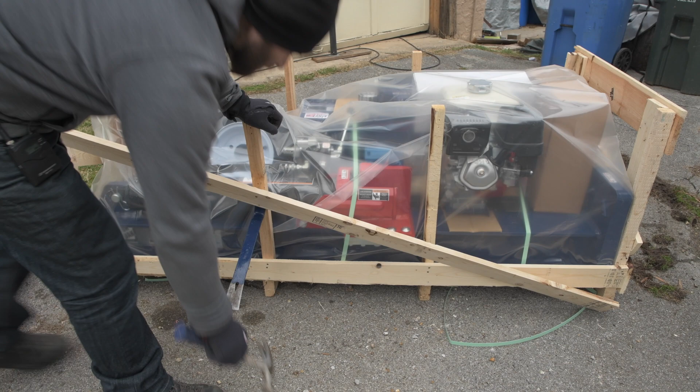Looks like the plastic's stapled down. Comes right off.

Got a couple of boxes here. We'll bring the camera around.

These appear to be wheel covers, fenders.

Let's see what this guy is. Razor blade's dull.

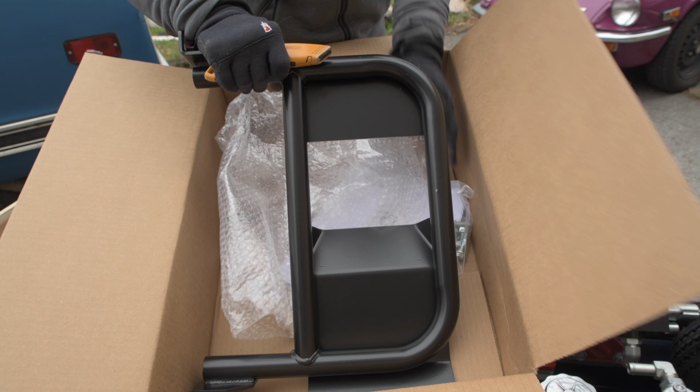That is some sort of big, huge metal guard thing. And this is what I was looking for - these appear to be the instructions. That's what I need. 24, it says. There's another owner's manual.

All right, good stuff.

Hydraulic hose or hydraulic hose armor. And some more metal guards - I'm sure they go somewhere.

We interrupt this unboxing to bring you the most handsome white cat in the world on top of a purple 1972 - I don't remember the year - 1972 Triumph Spitfire. Doesn't he look gorgeous? Are you camera shy? You don't like looking at the camera, do you? What's up with that, man?

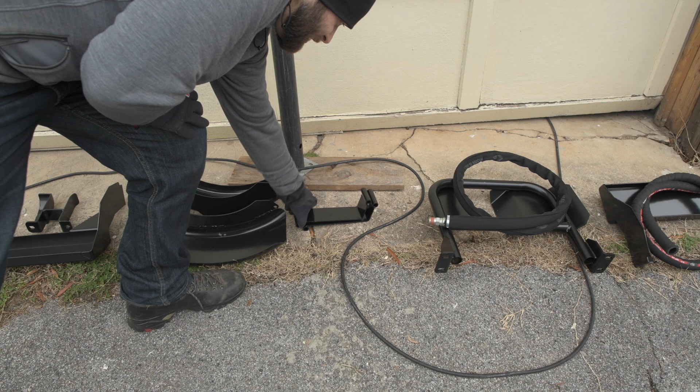All right, here I have laid out on the ground all of the parts I got out of the boxes. Some sort of a tray thing, some sort of a brackety thing, looks like wheel covers, more brackety things, some sort of a guard, hydraulic hose armor or soft hose or something - I'm not sure what that is.

And another tray, that looks like an identical copy of the first one at first glance. So all of those were in boxes. And this is what we have left on the crate: an instruction manual for an engine guard, kind of weird that you'd need a manual for that, but it seems to be the thing. And then the actual owner's manual, which is fairly thick. I'm going to read into that in a minute.

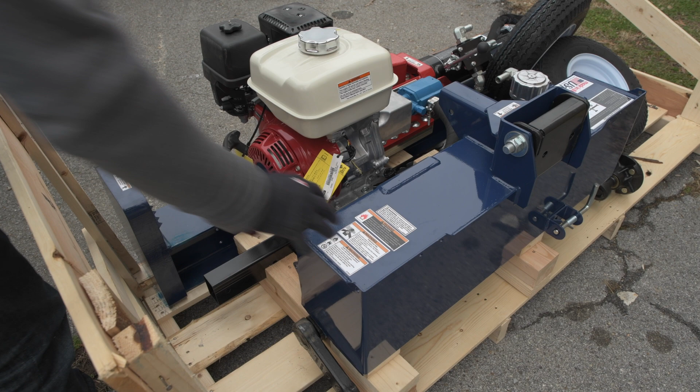And this is the Honda motor engine. Looks like maybe this part is the hydraulic tank, or probably the hydraulic tank, and also possibly the torsion axle. Looks like maybe these are wheel hubs here.

If we move the tripod here, come around, we got our wheels. If we come around a little further, trying not to bump into anything, looks like we've got our beam and our hydraulic cylinder. So this is the hydraulic cylinder, and that's the splitting wedge. And this guy underneath it all, the blue one there, is the beam, which looks quite beefy. So, sweet.

All right, I gotta read some instructions, and I'll be back to move on to the next step.

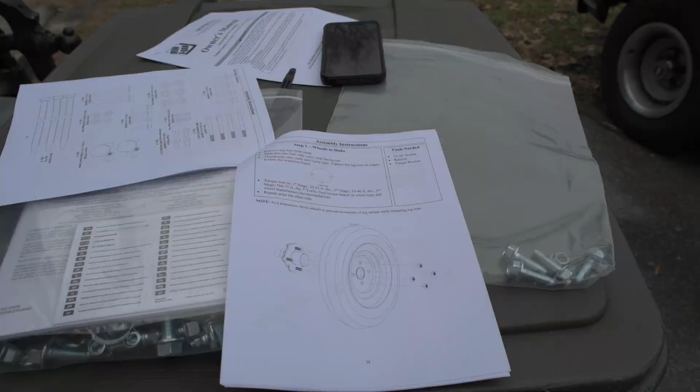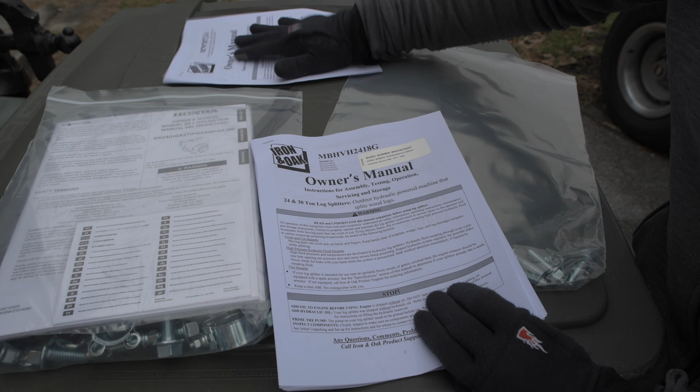Okay, it took a little bit of doing to figure out where the assembly instructions were. They give you a couple manuals here. So what they give you is the owner's manual for the engine guard, installing the engine guard - that's one thing. They give you the owner's manual for the Honda motor, so that's fine, I'm sure that's from Honda itself. And then this is the owner's manual for the splitter.

If you start reading it from the front, you might get a little discouraged because they talk about initial setup here, but they don't talk about assembly. And they talk about things like adding oil, and as far as I can tell, mine didn't actually come with any oil, so I'm gonna have to buy oil separately. But we're not even worried about that yet, we're just getting it off the crate and trying to assemble the damn thing.

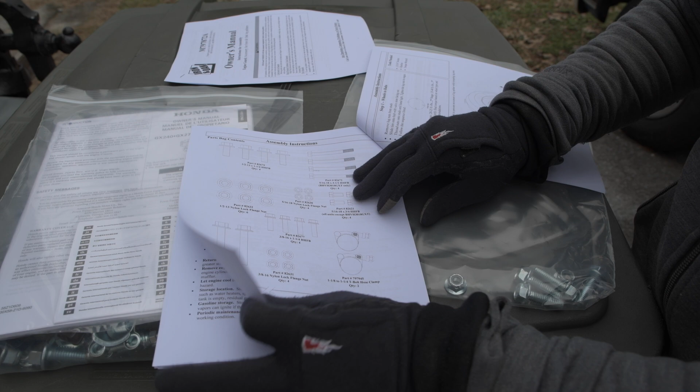So in the back of the manual, you have a parts bag contents guide and a little schematic of the various components here. So that's helpful. And then you do actually get assembly instructions.

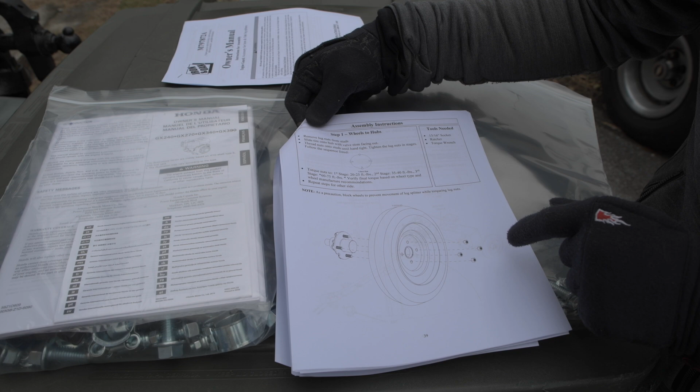So we're going to start with step one, attaching the wheels to the hubs. And I think in order to do this, I'm going to have to get the hydraulic tank and axle assembly off of the crate. So we're going to do that first.

Okay, I took a break for about an hour and put on another layer of thermal underwear so I'm a little warmer. Now what we're gonna do is try to put some wheels on these hubs. This whole thing, like the engine assembly, is attached to the tank here. So I think what I'm going to try to do is slide it backward enough that I can get one of the wheels on, and I might have to jack it up or something, we'll see.

Let's see, I don't want anything to get damaged as I slide it off here. I'm not sure why though. Just gonna go for it.

All right, so I need this wheel to go on here. Let me get a lug wrench - looks like a 12 millimeter. For some reason they're on there tight, that doesn't really make any sense, does it? Yeah, got one loose. That's two. Three. How do I get that fourth one though? Let's see. There we go, got it. All right, so that's one. That was entirely too complicated.

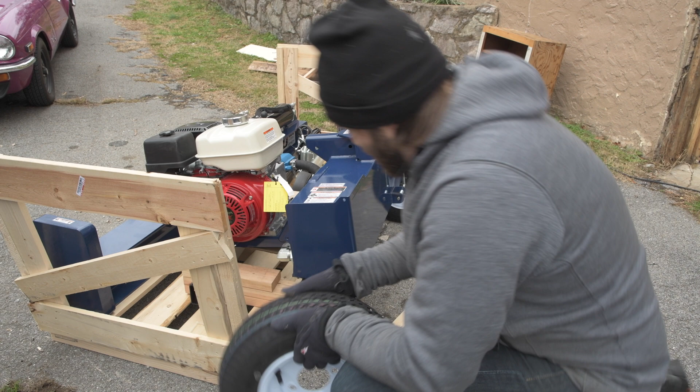The second tire of fun. All right, second tire's on.

I may cut this from the video, but imagine a world of sentient trees watching this video where we on Earth develop tools to split their bodies down the center using hydraulic pressure - torture machines, almost, except they're already dead, so butchering machines, I guess. Anyway.

That's the kind of crap that goes through my head when I'm spinning a wrench. Okay, so that's wrench hand tight, but now I think I need to lower it down on the ground to tighten it all the way so it stops spinning. Let me get some stuff out of the way. So what I'm gonna try to do is push it off onto the ground, but I don't want the engine to flop around like a wet noodle, so I'm gonna be careful about that.

Let's see, I think I should be able to just lift it up like this. Yeah, there we go. Okay, all right, that should be good enough, I think.

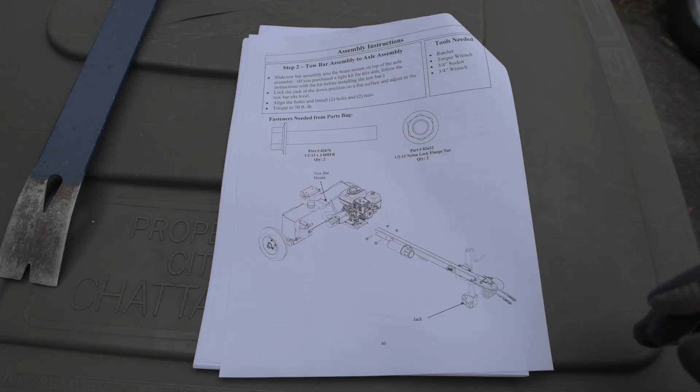Okay, step 2, tow bar assembly to axle assembly. Slide the tow bar assembly into the beam mount on top of the axle assembly - so we're gonna slide the tow bar into the beam mount right there. If you purchased a light kit for this unit, follow the instructions for the kit before installing the tow bar. I did not purchase a light kit, so I don't think that's a thing for me. Lock the jack in the down position on a flat surface and adjust the tow bar so it sits level - so that's the jack right there.

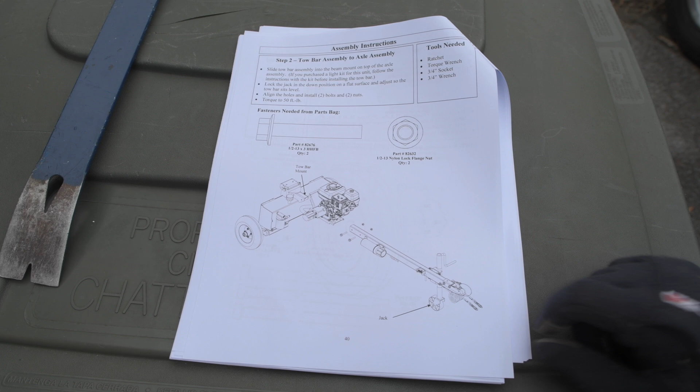Align the holes and install 2 bolts and nuts, torque 50 foot-pounds, part number 82632, and it's about that length. Let me see if I can find something that fits that - I believe that is this one here. Got 2 of those. And these giant... what does that say on them? HN? Giant bolts here with nylock nuts, integrated nylock nuts.

Cool, all right, so this will be nice because then we'll be able to roll it around afterwards and it'll be a little bit easier to deal with, hopefully. Okay, so I'm gonna roll this backward very carefully to get it off of the unit here, off of the crate. Very carefully - oh, it's heavy. It's even heavy with the wheels. It's a little frustrating.

Just need to take a step. Okay, that's doable. Spin that around very gently. Put it down - there we go.

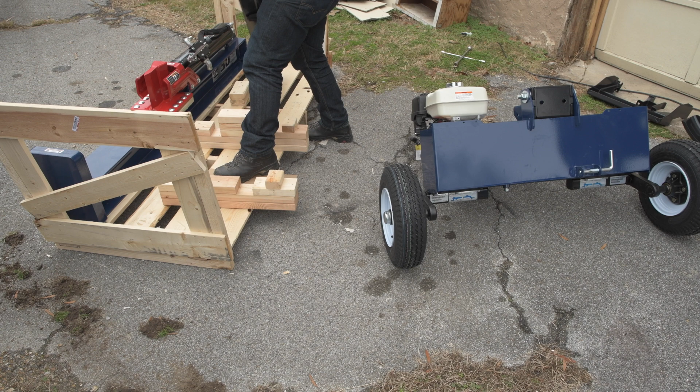All right, there's the tow beam, and it appears to be upside down as it ships. There's our jack right here, so we're gonna lower the jack. Hopefully I'm not gonna whack myself with it here. Oh, there we go, there we go. Put that like this.

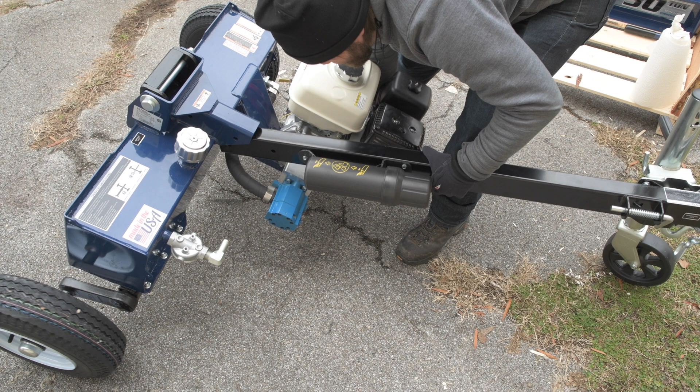This would probably be easier with 2 people, because I'm gonna have to lift up that part and slide in the beam at the same time. All right, I'm gonna attempt this by myself and probably fail - almost certainly going to fail. I don't know how I'm gonna lift both of these at the same time. So this is gonna be going in there like this, like that, and then if we lift this up with one hand, can we slide it in? Probably not. No.

All right, I'm gonna go get my partner's son - I need 2 people. Okay, so I've enlisted my partner's son, Parker, and he's gonna help me. I'm gonna show you what you're gonna do, Parker - I'm gonna lift up that engine, since it's on the wheels, so I'm gonna lift it up so it's horizontal, parallel to the ground. And what you're gonna do is take this beam here and slot it in to that mortise, for lack of a better word, whatever that is. All right.

And you're gonna be quick about it because it's heavy. All right, here we go. Let's see.

All the way in. Try to get it straight. It's got to go all the way back. There you go, further, further. Yeah, there we go, perfect. Right there. And then hold it.

And I'm going to put these guys in, right there, and one right there. Yeah, that is the correct way. They go from the side with the fill cap here. So what we're gonna do is I'm gonna have you push these in, okay, just with your finger, and I'm gonna kind of lift up here to relieve the pressure so that they go in. There we go, okay, perfect. All right, that's it, thank you.

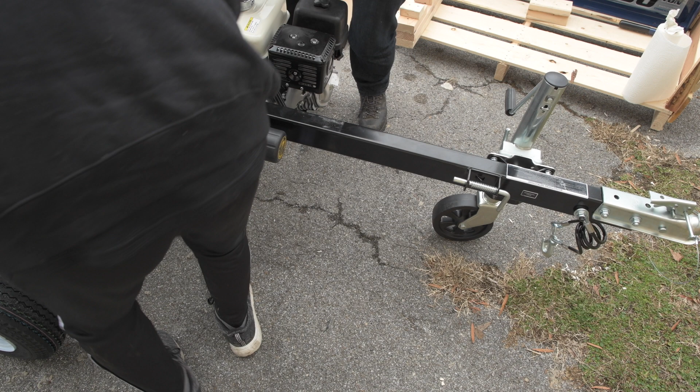Much easier when you have somebody to help.

Okay, and the next step is to tighten down these bolts. And I believe it is a 19mm. I don't know if they're building this thing in metric or if I'm just reaching for metric wrenches and they fit. I don't know what it is in SAE, sorry. But 19 seems to be a pretty good fit for this. So...

Ooh, she's rolling on me. Need a wheel chock. And the one in the back as well. All right.

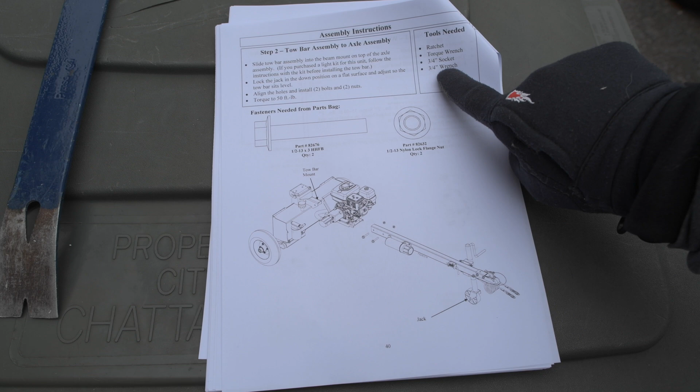All right, and they do list 3/4 inch socket and 3/4 inch wrench for this step, so I am indeed just reaching for metric tools. So 3/4, 19mm, same thing I guess. All right, let's go on to the next step.

Beam assembly. Caution, beam assembly is top heavy. Carefully stand beam assembly in the vertical position on solid level ground. Assistance from a second person is required, so you do not get squished. Make sure beam assembly is standing on flat level area. Have another person steady the beam to prevent it from tipping over. The beam assembly weighs approximately 350 pounds and will cause bodily injury if it falls on someone.

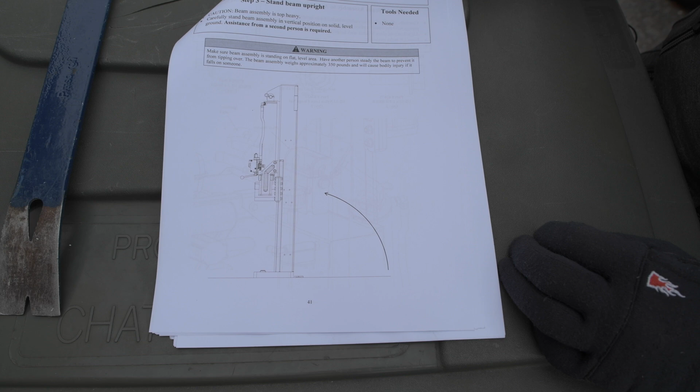Wow, that is quite heavy. I am only 185, I believe, so that's almost twice as heavy as me. That's crazy. Let's see what step 4 is.

Carefully align the axle assembly to the beam assembly. Have a person hold the beam in place while maneuvering axle assembly. Align holes in the pivot bracket with holes in the bottom of the beam. Insert the 2 bolts as shown, add 2 nuts. This is the pivot bracket, and we are putting in 2 bolts through the pivot bracket on the back there, I'm guessing, and 2 nuts. Huh, interesting.

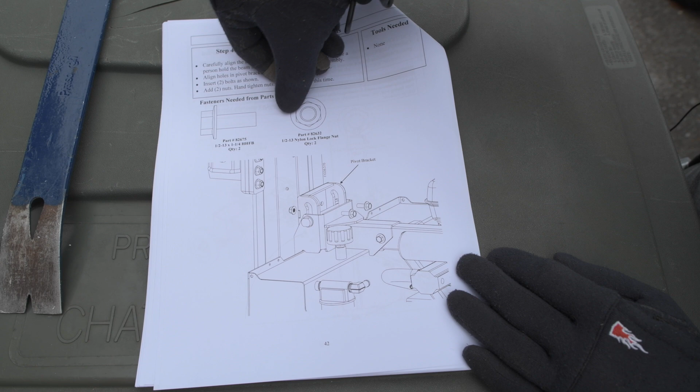Okay, cool, let's do it.

Okay, so I have swallowed my pride and enlisted the two teenage boys in the household here. So I think what we're gonna do is we're gonna take this off of the pallet here, and then we'll get the pallet out of the way, and then maybe we'll put like a furniture dolly underneath it and roll the beam over here and stand it up.

Hang on. Just, there we go. I think we put the heavy end on the dolly because I don't want to carry the heavy end very far. All right, you ready? I suppose. Yeah, because I'm not. Oh. Okay, here we go. 1, 2, 3.

Ah. Right? Yeah, in a way. You think this end's heavier? Maybe. I mean, I could get it if you need me to. I just... it might be. I don't know.

Wow. All right, let me see if I have another furniture dolly. There's no way I'm carrying that. Yeah, get that out of the way. Excellent plan.

Wow, that's heavy. Okay, ready? Don't let it slide into the truck.

Let's see, like move that this way, I guess, so that we can. And then I'm gonna lift this up off the dolly. Jack, can you? I'm gonna stand over it like this, and if you can just slide the dolly out of the way.

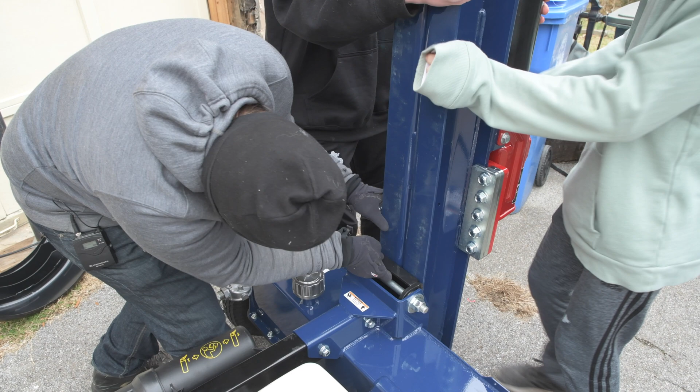Yeah, I'd say that's good. All right, cool. Can you slide it this way a little bit? Just kind of walk it a little bit. There you go, a little more. That's good, right there, stop.

So I'm gonna put the bolt in from the bottom, I guess. And lean it just a tad the other way. Right there. Come on, buddy. Okay, that's 1. All right, and then get 2 in here.

Sorry about the cold, you guys, your hands have to be freezing. I'm actually in my hoodie, so it's fine. That makes sense.

Okay, and then they want that to be finger tight, which I'm not real sure what that means. I feel like I should tighten that down a little bit. So I don't even know how I'm gonna get a wrench in there. I guess like that, that works just fine.

So your entire YouTube channel is just you recording the shit that you do? Yeah, pretty much, pretty much. Me hurting myself, recording the shit that I do, me swearing, occasional cats, that sort of thing. Me swearing.

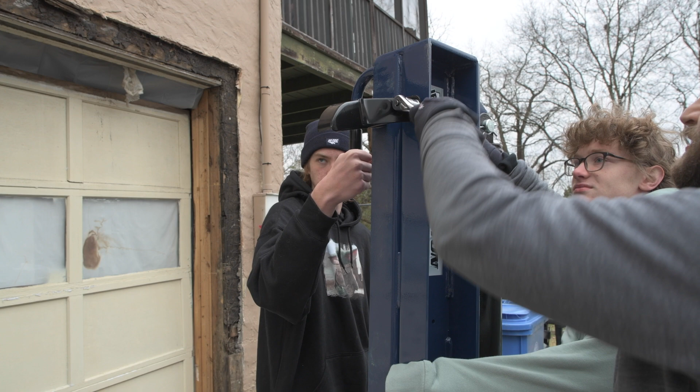So I'm not tightening this up all the way. I'm just making it so that it's nearly tight, right, like so that the nut contacts the pieces. They're giggling because they're teenagers. I cannot say nut without getting the giggles. Have any of us though, really?

Okay, so what we're going to do now is we're going to very carefully lower this down on the beam rest, I think. So it's going to come down this way. Just keep your eye on those wheel chocks there and make sure they don't move. There we go, okay excellent. So this is going to come down like so. Cool.

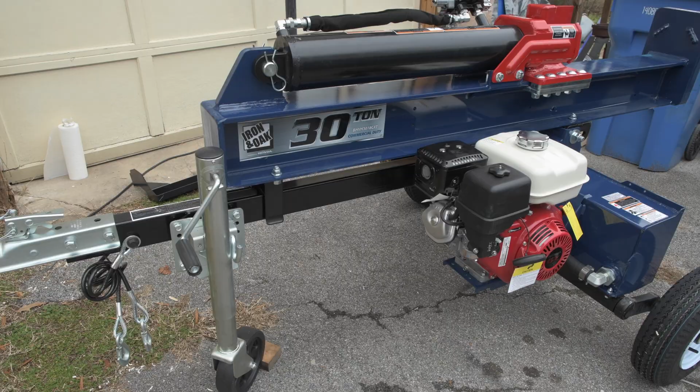And now I have to finish tightening everything. So thank you, boys, that was all I needed. Appreciate it. Okay, step 6, block and rotate.

So we've got the wheels blocked. Adjust the beam rest to ensure horizontal latch indeed latches the beam in the horizontal position. Let me just show you what that means. Okay, so this is the beam rest right here, and this is the beam rest latch. And the way it works is you pull and you push, and it just keeps the beam from rising when it shouldn't. So the reason why we don't tighten these bolts up here down all the way is so that this will actually mate properly. And once it's mated, then we can tighten these down all the way.

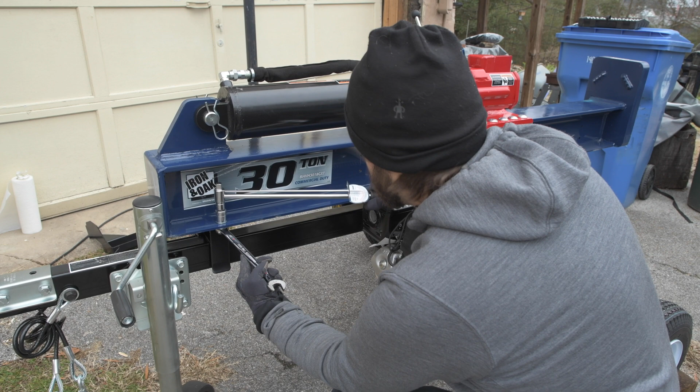And torque the fasteners installed in step 4 and 5 to 83 foot-pounds. So I'm actually going to oblige in this case, and I'm going to use a torque wrench to torque these down to 83 foot-pounds. There we go. Hopefully I don't break my torque wrench because I don't have a half-inch 19mm socket, so I am using a, what is that, a 3/8 or something? I don't know, hopefully it doesn't break. Okay, there we go, there's 83 on that one. I'll do the other side next.

For these back bolts, I'm using the box wrench on the back underneath, and I find that it actually fits if you have it at an angle, going off in that direction.

Verify that the latch still works. It does appear to, it's a little tight. It could maybe use being greased.

Step 7, high pressure supply hose. Rotate splitter to vertical position and latch the vertical latch. Remove plastic plug from pump outlet with pliers. Plastic plug is the outermost fitting, so that's this point down here.

Apply thread sealant to hose threads on only one end of the hose. I don't know if you can see that or not, but this orange stuff, I'm pretty sure that's thread sealant, so I think it's already on there. It comes like that from the factory.

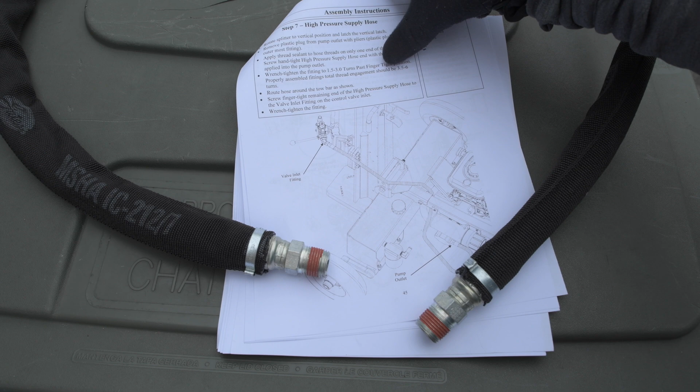Screw hand-tight the high-pressure supply hose end with thread sealant applied into the pump outlet. Then wrench tighten the fitting to 1.5 to 3.0 turns past finger tight position. Properly assembled fittings should have total thread engagement of 3.5 to 6 turns. So I'm guessing there's about 3 turns of finger tight there.

Route hose around the tow bar as shown. So they're talking about this - you gotta bring it under and then through.

Screw finger tight the remaining end of the high pressure supply hose to the valve inlet fitting on the control valve inlet - so that's the control valve over here. Wrench tighten the fitting, same thing, I'm guessing.

Simple enough, I think I'm gonna wait to do this another day. I'm running out of daylight here. I think I'm gonna put the cover on it for now. I've got the wheels chocked, and I'll come back to this probably tomorrow.

Here we are the following day. So what I'm doing is I am attaching a hose here and also here. This is a plastic plug, I believe. I've got to figure out how to get that out of there first.

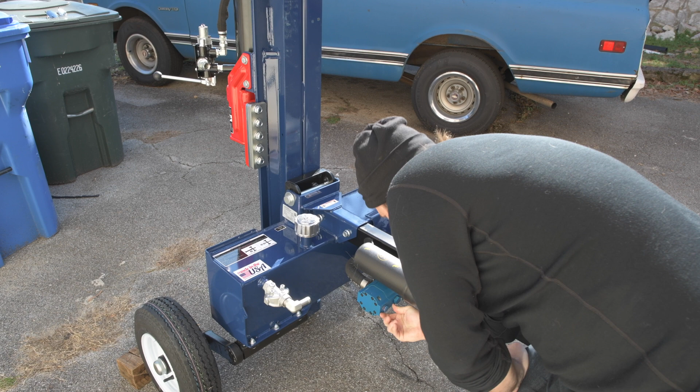I spent some time in the garage trying to find a wrench for this. I've been using metric for this project, so I tried 22 millimeter and 23 millimeter - 22 is too small, 23 is too big, just slightly. So I also looked at my SAE wrench set, and I've got a 15/16, which is too big, and a 13/16, which is too small. So it's probably a 7/8, but the instructions call for an adjustable wrench, so I'll just go with that.

I've got these locking adjustable wrenches. I don't like using them because they're not as accurate, but that definitely fits, so we're just gonna go with that.

I don't know if this is a screw fitting or not. You'd think it would be a screw fitting, in which case I was going the wrong way the first time because I'm a big dummy. Yeah, it's a screw fitting. Okay, so don't be dumb like me, do it right.

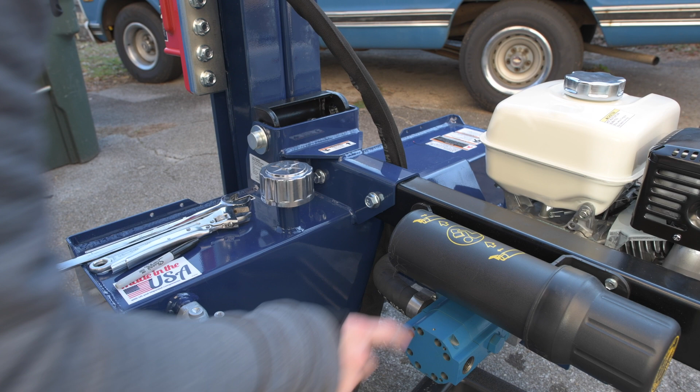It looks like there's a little bit of oil in there, so we're gonna need to put something underneath it. The reason why they wanted me to install this fitting first is because there is no nut on this one to turn, so I have to thread the entire pipe into this, and then I can tighten it up on the other side.

So I screwed up, I did this in the wrong order, and now I need thread sealant because I've ruined all of the thread sealant on the other end. Great, okay, it's just one thing after another today.

My black Sharpie dried out, but I got a brown one, so there's my mark. This is hand tightened, and now we want to do 1.5 to 3 turns, so let's see if we can make that happen. So there's one. That might be as far as we go - that's pretty much 1.5 right there.

Okay, it is 1:35 on January 17th, 2021. It's about 48 degrees outside. It's a Sunday - I was gonna come out here yesterday on Saturday, but the temperature was like low 40s and real windy. Okay, so we have some Loctite 545.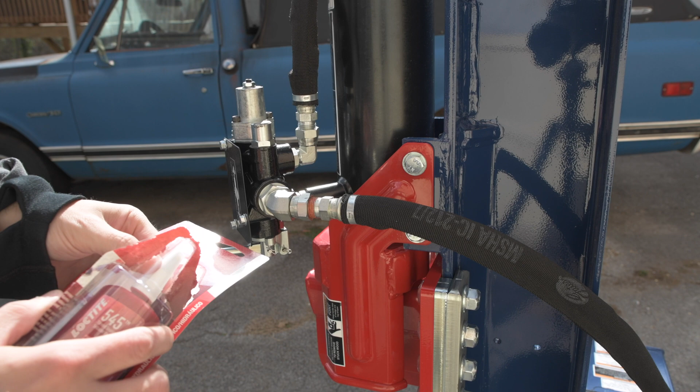This stuff arrived on Tuesday or Wednesday. The instructions for it are pretty sparse, but I think you're basically just supposed to put it on the threads and tighten it down. I think you're supposed to skip the first thread. So you can see where we've stripped the material there.

Directions: shake bottle well before use, clean and dry parts with Loctite primer. Apply 545 thread sealant to leading threads of male fitting, leaving the first thread without sealant. Apply only 3/4 of a turn - product does not need to be applied to all threads. Reassemble parts and tighten to recommended torque. So I'm going to skip that first thread.

And I'm just going to leave it at that. That might even be too much.

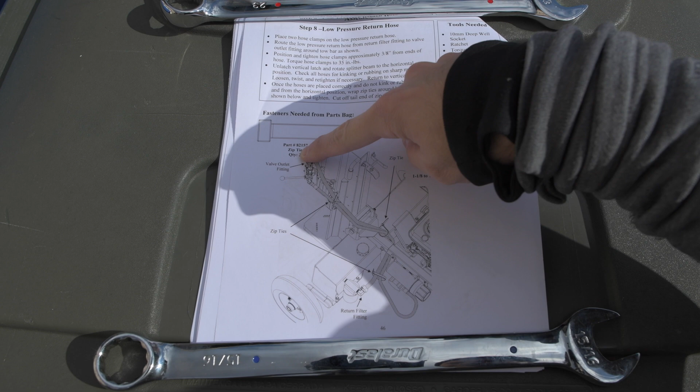All right, step 8, low pressure return hose. Place 2 hose clamps on the low pressure return hose. That's going to be this valve fitting here. Route the low pressure return hose from the return filter fitting to the valve outlet fitting around the tow bar as shown. This is the return filter fitting right down here, so we're going to route that to the valve outlet fitting. Position and tighten hose clamps approximately 3/8 of an inch from the ends of the hose. Torque hose clamps to 35 inch-pounds.

Unlatch the vertical latch and rotate the splitter beam to the horizontal position. Check all hoses for kinking or rubbing on sharp metal edges. Loosen, twist, and retighten if necessary. Return to vertical position. Once the hoses are placed correctly and do not kink or rub going to and from the horizontal position, wrap zip ties around both hoses as shown below and tighten. Cut off the tail end of the zip ties with a side cutter.

Zip tie there, zip tie there, zip tie there.

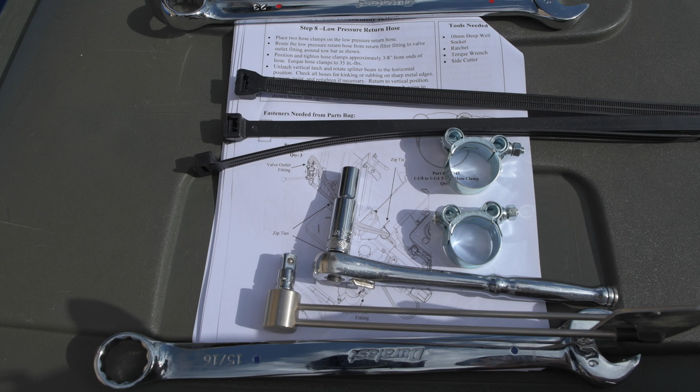All right, tools and materials we need for this step. We've got zip ties, these come with the log splitter. Hose clamps, these also come with the log splitter. I've got a 10mm deep well socket and ratchet wrench - these do not come with the log splitter. I've got an inch-pound torque wrench because they call for 35 inch-pounds, also does not come with the log splitter. And I've got a side cutter, this is from Harbor Freight, a cheap side cutter for the zip ties. Hopefully that's everything we need.

Okay, this is the return filter fitting, which interestingly enough does not have a filter on it. I don't remember seeing one with the parts either. Well, I'll have to think about that in a minute. Anyway...

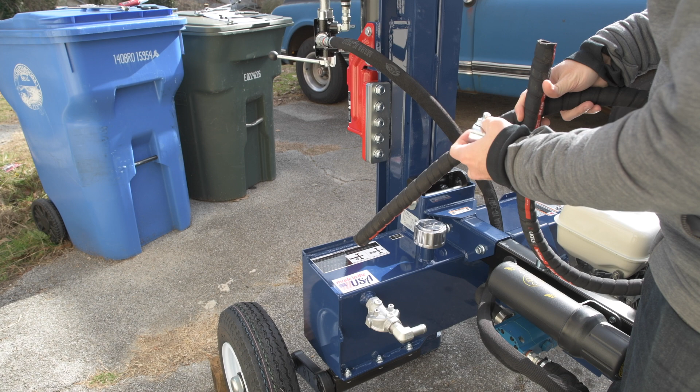So this is the hose, and they say to start on the return filter fitting, and I'm going to do exactly what they say this time because I learned my lesson. So I'm going to take my hose clamp here, put it onto my hose, and feed it through right here. So that's going to go on there, like so, and our clamp is going to go on right about there. And this is the other end of the hose - it's going to come around and come up here and go into this fitting here, which you probably can't see.

All right, so here it is on this side. Put this on first, twist it down, and right there. All right, I'm going to go ahead and tighten this one because it doesn't really specify an order. Once it starts getting snug, I will transition to the torque wrench. They say the clamp should be about 3/8 of an inch from the end of the hose. I'm not going to measure that, but eyeballing it, it looks okay.

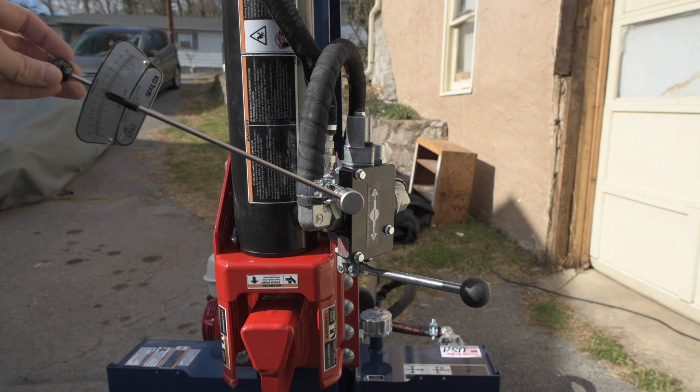All right, switch to the torque wrench. I doubt 35 inch-pounds is really that tight, but we'll see. Let me give you a better angle. So you might not be able to read this, but basically this is an old style torsion torque wrench - they tend to be a little bit more accurate than the mechanical click kind. I like them just because the mechanical click kind apparently need to be recalibrated all the time, and I don't like dealing with that. So basically the needle should just point to like the 35 when looking at it from the front. That is 35, right? Yeah, 35. Okay, so let's see what happens.

Go around. I don't think we're anywhere near enough pressure yet. We'll just keep going until it starts looking like it's getting close. We're at about 20 inch-pounds. Not even, 15 to 18. Oh, that's getting close, it's about 25.

That's 30, 35, right about there. Okay, I'm just double checking my work here. It seems like it goes through moments of stiffness and moments of not stiffness, so I'm doing it more than once here.

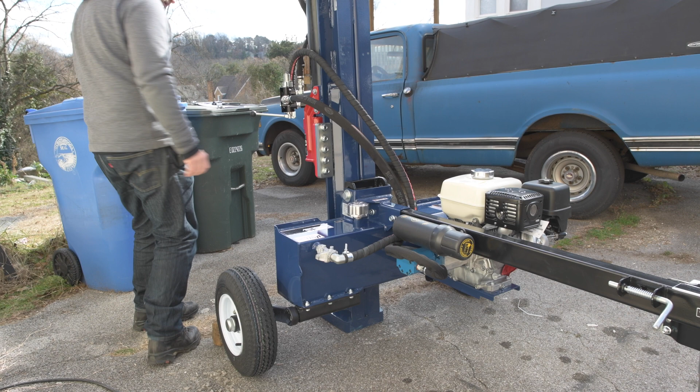All right, and next they want me to open and close it a few times just to make sure it's not kinking or anything. So we're paying attention to these hoses here. Hopefully they don't kink.

You know, that one's kind of hitting the engine body there. I think I'm going to do that one more time, and when I lower it, I'm going to loosen one of the clamps and see if that keeps it from touching the engine, the fuel tank. So let's see what happens here.

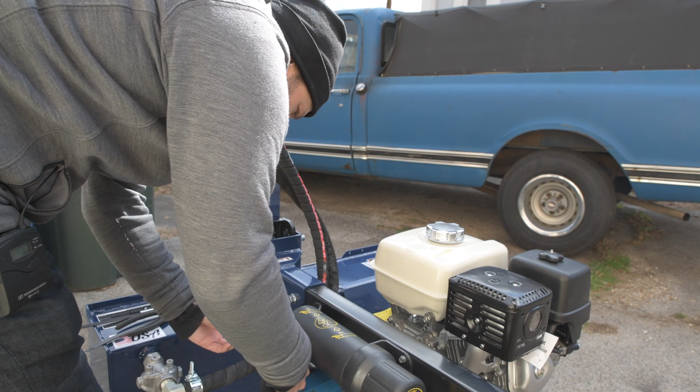All right, that appears to be 35. So they want one here. These are the biggest zip ties I've ever seen in my life. They're huge. Okay, one there, one here.

All right, let's see if that closes properly with the zip ties in place. Seems okay to me. All right, cut them off with the flush cutter.

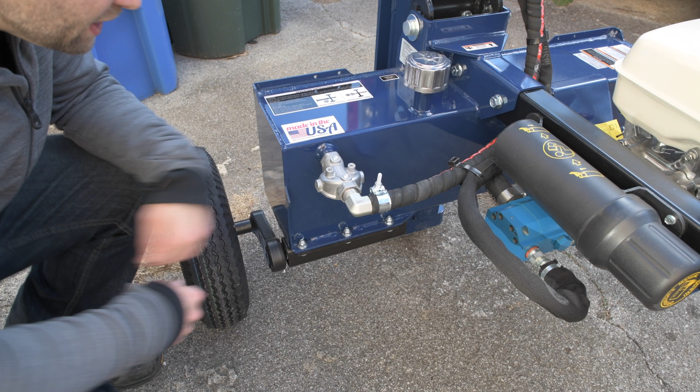All right, so I checked my user manual, and they definitely list this hydraulic filter as a part number that should come with it. So it's possible that at some point they decided not to ship those because you do have to buy fluid. It's also possible that they just omitted it. I suppose it's also possible that it was in the packaging somewhere and I missed it.

You know, I've got footage for every step of this, so I'll go back through, I'll upload my footage tonight, I'll go back through. It's Sunday, they're not open at the moment, so I can't call them to find out. And if they were supposed to ship me one, I'll get one shipped out. Otherwise, I'll buy one, so no big deal.

But we still have a few steps left that I can do today. I think we can, well, we've got the log tables to install, we've got the wheel guards to install, and we can fill up the Honda engine with oil and stuff like that. So let's just move on to the next step here.

All right, step 9, log tables. Rotate the beam assembly to the horizontal position, insert 2 bolts in lower holes in the beam assembly, and install 2 nuts on bolts, leaving them loose enough to install the cradles. So we're installing these cradles here, putting 2 bolts in the lower holes first through the beam and 2 nuts. Slide log tables onto bolts, install upper 2 bolts and 2 nuts, and tighten to 34 foot-pounds instead of inch-pounds. Tools we need: ratchet, torque wrench, 9/16 socket, and 9/16 wrench.

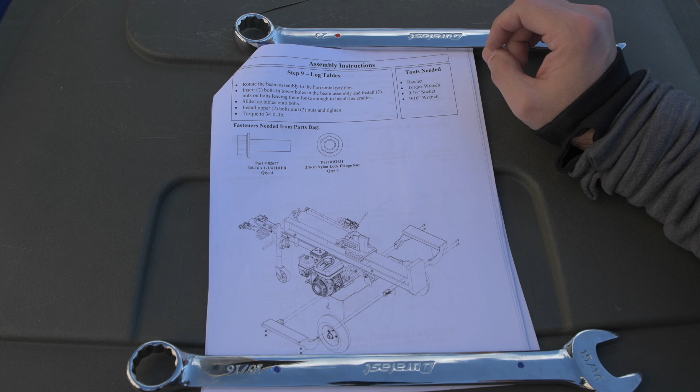So let me grab those. All right, 9/16 wrench, 9/16 socket, and torque wrench. The ratchet is attached to the socket. And as far as hardware goes, we've got these, 4 of those, and then also these, 4 of those. So I think we're all set.

Let's get started. First step is the horizontal position. There we go. I think what they want us to do is put this bolt through here like this and screw the nut on, but not tight, just loose, and then do the same thing with the other bolt. So those are nylock nuts there, and I'm not engaging the nylock.

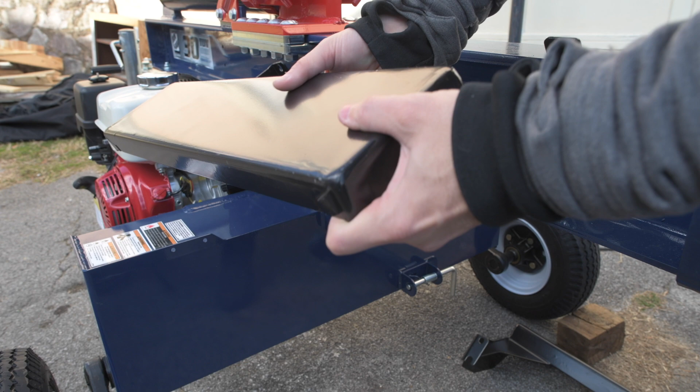And then I think what they want us to do is just lift the table up, and it's got slots on the bottom, you can see. So you're just going to slide those slots down onto the bolts. That's the theory anyway. Problem is when you do that, they just want to fall off. So I feel like you need an extra pair of hands for this.

So I'm the kind of guy that doesn't like to ask for help, so I'm going to try to do this without any help. We'll see if it works. It probably won't. So what I'm going to do is slide that on like that, and then put a bolt through the top slot, and finger tighten the nut on the other side, just to hold it on. I'm just going to do one, and I'll do the same thing on the other side.

Except I need that nut to come off now. So maybe I can hold it all up and loosen that up, and then slide this one back on. Okay, and then if I push that through and just hand thread the nut on, as the white stripes say, that was all that I needed.

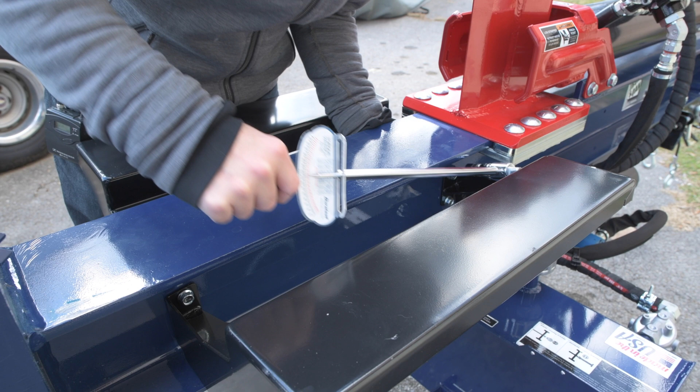I'm not even really sure that I'm going to be able to get a torque wrench in there for these top bolts. I think that's going to be impossible, there's no way to do that. So it's a nice thought, but no, I don't think I will be putting a torque wrench on it. I think, look, these things are just holding logs, right? So I seriously doubt that it's that important that they're torqued properly. I'm just going to tighten them down, crank them down pretty hard. I think that'll be fine.

Step 10, fenders. Align holes in fender, fender extender, so these are the fender extenders, and fender mounts on axle assembly. Insert 2 bolts and secure with 2 lock nuts. Torque to 19 foot-pounds. Repeat step for other fender.

Seems pretty straightforward. We need a 1/2 inch socket, a 1/2 inch wrench, and it looks like the only parts I have left in the bag are those guys. 1/2 inch wrench, 1/2 inch socket on a ratchet.

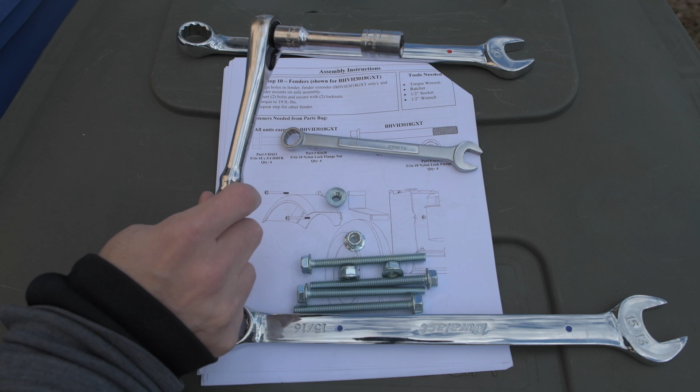All right, I figured I'd start on this side because it's a little bit easier for me. So all we're doing is we're taking this guy, I believe, putting him like that, and we're taking this guy, we're putting him like that. We're just gonna feed a bolt through, like so.

It's a little tight, so I'm actually threading it in, but probably a little bit of force would work as well. Yep, there we go. And then we're going to attach the nut. I believe it said it's a lock nut. It's right here, there's the nylon. All right, cool, all right, feed this one through the same way.

And tighten it down by hand. Okay, there's a better view. You see how this is a straight line and then this nut is kind of canted off to the side? It looks to me like the bead of the weld has gotten in the way.

Not really sure what to do about that. I don't want to grind it down because this is a high pressure vessel, so, or at least I think it's a high pressure vessel, so I really don't want to remove material. I'm just going to tighten it down as best as I can, and we'll see what happens. If it falls off later, it's just a fender, it's not that big of a deal.

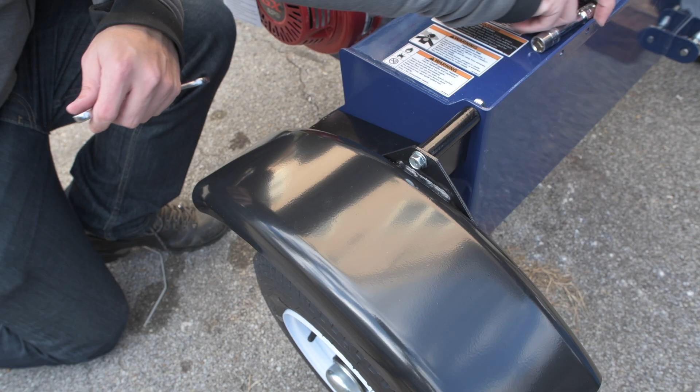Tighten this one down as well. This one looks like it mates properly. All right, let's use the torque wrench. Okay, we're supposed to be going to 19 foot-pounds. I feel like I'm gonna break this nut off because it's canted at such a weird angle. That's 19 right there, all right, so hopefully that holds and it doesn't shatter.

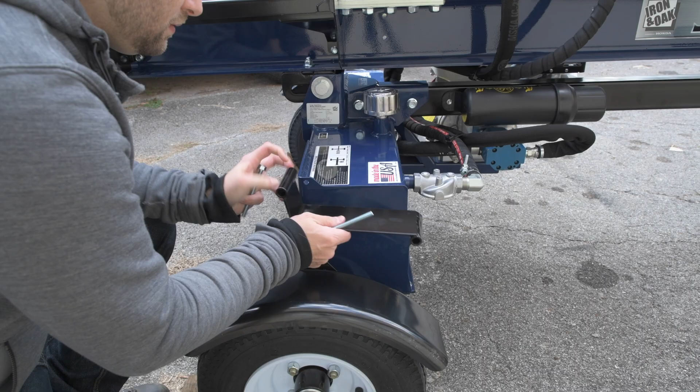All right, there we go. Same thing on this side. Okay, use the torque wrench.

Sorry about that, my camera battery appears to have died as I was torquing down those bolts. But anyway, you didn't miss much, I just torqued them down.

What I wanted to show is, you see this gap here? You see how you can see light through that? I can probably show that a little better with this. You can see here that a little bit of light's coming through on this edge. It's tight down here and tight up here, but it kind of kicks out. I think that's because of this upper bolt. I think this weld might be kicking it out a little bit, although I'd think that would cause it to go the other way. I'm not exactly sure what's going on there, but it doesn't appear to be precision machined so that you get a tight, gapless fit. I really don't think it matters though, so no big deal. Just thought I'd point it out.

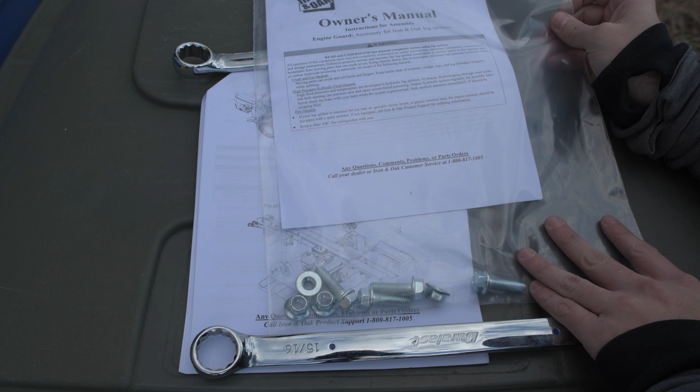Okay, final step of the assembly instructions. There's still quite a bit more to do after this as far as initial machine setup goes, but the final assembly step is the light kit and the engine guard. I don't have a light kit with mine - I guess I could buy one later if I need to - but I do have an engine guard that it ships with. There's a separate owner's manual for the engine guard, but let's see if we can figure it out from this instruction set.

Yeah, it looks like there's 4 bolts and 4 nuts and it just bolts on. So let's give that a try. This is the engine guard, and it appears to go right here, protecting the top of the gas tank and engine assembly, so that if something falls on it, it's less likely to catastrophically end the engine.

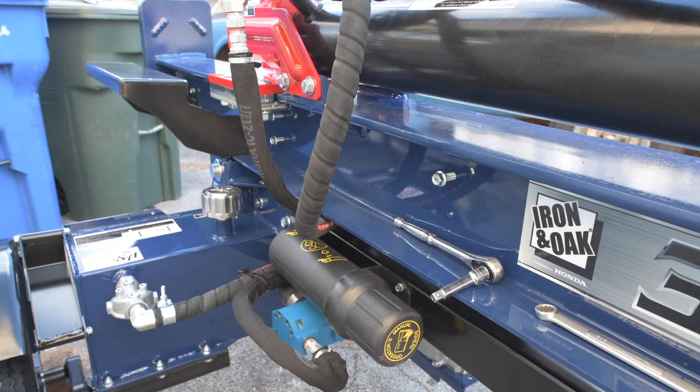Looks like these are 9/16. I've noticed the bolts are a little tight going into the holes, so I'm going to go ahead and screw them in with the socket wrench. I could probably hit them with a hammer or something, but I don't want to screw up the threads. It's probably just paint that's in the way, not a big deal.

Okay, now we can go over to the other side and attach the nuts. My little short extension is fine. Okay, I think that's good. I should probably torque that down, but I'm not going to - I just made it pretty tight. It's not like it's a structural component or anything, it's just a guard.

As far as I can tell, the machine is completely assembled. The only thing left to do is sort out the hydraulic filter issue - I'll do that tomorrow morning - and also go through the initial setup instructions.

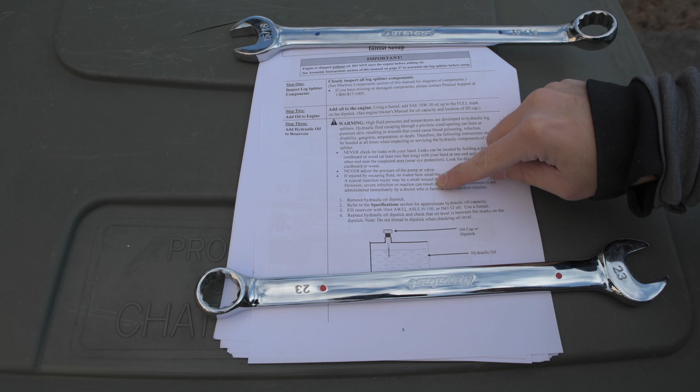So the first thing to do is add oil to the engine. We don't need the hydraulic oil filter in order to do this, so I think we should just go ahead and do it. Then it's time to add the hydraulic oil, which I don't want to do until I've got the filter on. So let's add oil to the engine.

These are the Honda engine manual instructions, and boy, it's really windy today - good kite flying weather, too bad I'm trying to film. It looks like the oil drain plug is on the very bottom of the engine, and the fill cap and dipstick are just slightly above it, which is super annoying.

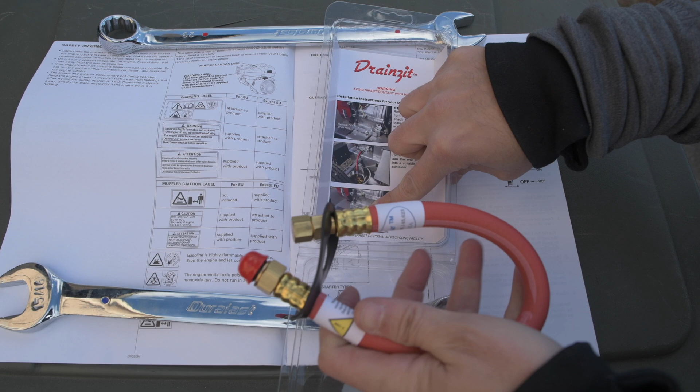So now might be a good time to install the Drainzit hose. The way this works is you take the oil drain plug at the bottom and replace it with this hose permanently. Then if you need to drain it later, you remove the cap on the hose and drain it cleanly. I don't know if this is a good idea or not, but I decided to buy it. Now is definitely the time to install it, because if we filled it with oil first, I'd have to wait for my first oil change. So this is definitely the time to do it, let's go ahead.

We'll put that on. Okay, so here's the actual engine. I have a drain pan down here, just because there's probably a little bit of oil in there, if nothing else. This is probably the drain plug, and that's probably the fill plug, so I'm gonna loosen this up.

So I'm gonna put this cap back on. I'm not gonna install this. I think this is a bad idea. You've got a skid plate down here protecting the bottom of the engine. I'm gonna put my cap back on, my drain plug cap. I would rather not lose the oil in my engine by accident and not realize it. I would rather have the draining of the oil be messy. You can definitely see that it's not the cleanest thing in the world when you're draining this, right? I mean, I'm getting oil everywhere. So there's a point to it for sure. I see what they're saying, but I'm gonna pass on that one.

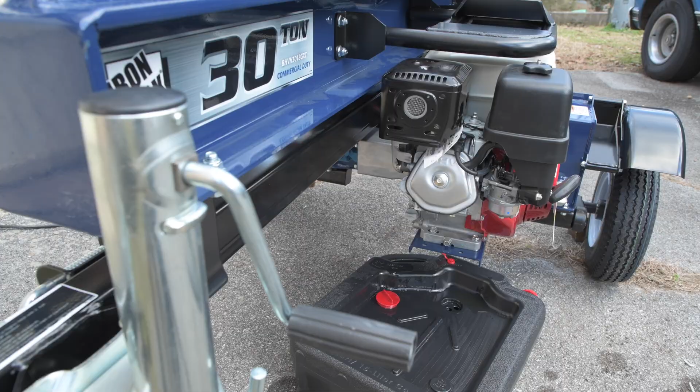All right, managed to get myself a funnel. Let's see if it fits. Reckon that'll work. So we've got 10W30, 1 quart. It takes 1.2, so we're gonna dump this whole quart in, more likely than not. Didn't seem like it had a whole lot in there when I opened the drain plug. It's kind of cold out, so I'm just letting it drain. Check it with the dipstick. So I think we're good. If anything, it might be a little overfilled, but I think it's probably okay. So I'm gonna leave it like that.

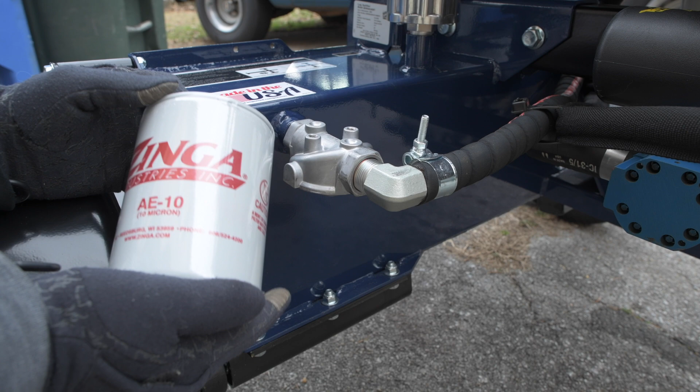All right, it is Saturday, January 30th, and I had contacted the company, Iron and Oak, or their parent company these days. I think Iron and Oak is just like a brand or something. It was some other company that picked up the phone. But they sent me this AE10 10 micron Zinga Industries Incorporated hydraulic filter, or oil filter, I guess it is. Anyway, they said it was supposed to come with the unit, and it didn't. So it took like a week and a half to get it. I had to call them back once, but it did show up, no cost to me, so that's cool.

For my hydraulic fluid, I have STP automatic transmission fluid, ATF. This is Dexron 3 compatible.

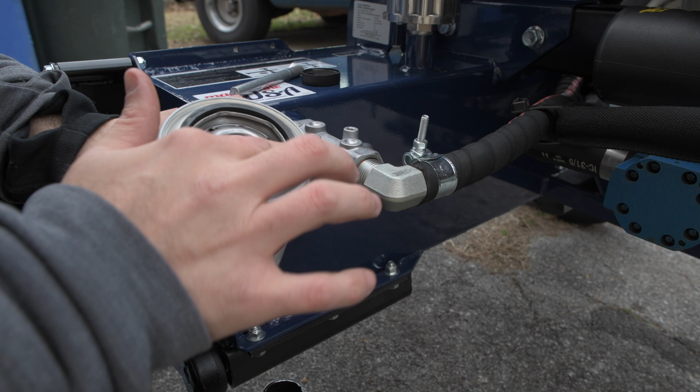Okay, apply clean oil to new filter gasket. Do not use grease. Make sure the gasket is seated. Screw filter onto the base until contact. Tighten 1/2 turn. Refill and run system. All right, so I'm gonna screw it on until it contacts. Okay, so there's contact. So I'm going to use caution here as my 1/2 turn indicator, and that's going to go to the back.

Okay, right there. Now we should be ready to fill it up. Let's fill this guy up. So I was reading the instructions. Normally they would want you to clean the strainer, but since this is the first time filling it, I'm not going to worry about cleaning the strainer. I'm going to assume that it's already been cleaned. Hopefully that's not going to get me in trouble.

So the first thing we're going to do is remove the filler cap. I think if I set this in the vertical position, I might even be able to pour into this without a funnel, but I have a funnel, so I'm just going to use the funnel. And it takes 10.5 gallons of hydraulic fluid. I said earlier that I'm using STP automatic transmission fluid. It is Dexron 3 compatible. It's just what I happened to find at the store, and I believe each one of these containers is a gallon. Yeah, 1 gallon. Okay, so 10.5 is what we're doing. Let's go ahead and fill her up.

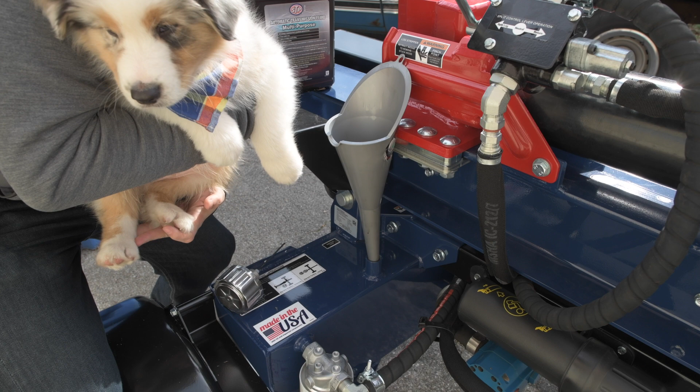That's 1. That's 2. Let me just introduce the camera to my new neighbor. Ah, this is my new neighbor. He is the cutest little dude ever. His name is Finnegan, and I am officially his grandfather now. I send him home after we play. He's the best. All right, go ahead, have fun.

The dog puts a stupid grin on my face every time I see him.

I am not a dog person, but I love that dog. He is great.

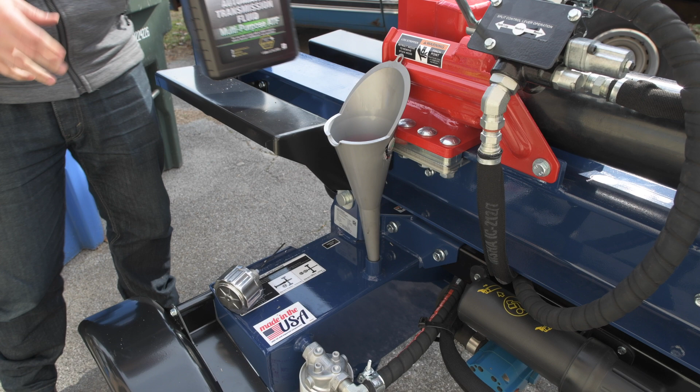All right, that's 3. I believe that's 4, unless I lost count. I think that's 5. Okay, now I have another gallon for the half gallon, right? Because we need to do 10.5. But what I have is a 5-gallon bucket, so I'm going to save this for the half gallon for when we need to do it, and I'm going to empty the entire 5-gallon bucket in.

So for this part, I bought a 5-gallon bucket of the same oil, and they only had one 5-gallon bucket. They're cheaper, right? They only had one, so that's why I had the 6 gallons in the 1-gallon containers. I would have bought 2 of them if I could, because they were quite a bit cheaper.

But I asked the guy, I was like, how am I going to get this out of the bucket? And he said, well, you need a pump. I think they make electric pumps, I don't know how much they cost, but I feel like they're kind of expensive. So I hope I don't live to regret this, but this is a hand pump, and I'm going to try to pump this entire 5-gallon bucket out by hand. It's probably going to be awful.

So these hand pumps have little valves in them, you have to look at which way it is. I don't think it comes with any instructions, but I think the valve that opens, like you hold it upside down, you can see that it's opening there. I think that's going to be the part that I dump in here to the funnel, all right? So I'm going to put the hose on the other end.

Just get it on there, if it fits. I don't even know if it fits, honestly. It does not seem like it's very well designed.

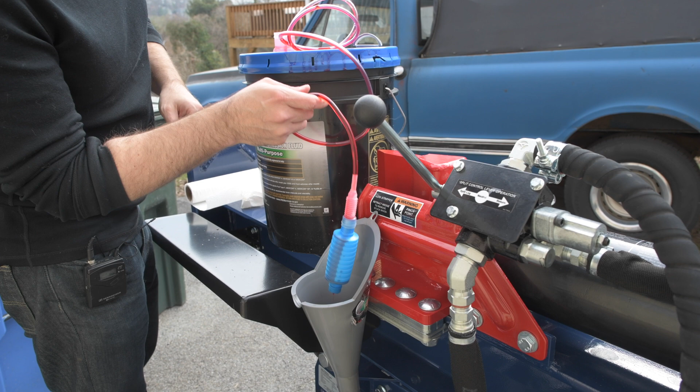So I've put the bucket up on the log rack. I'm attempting to get a siphon going. I think I'm probably failing miserably. I don't really know.

I think what's happening here is that the viscosity of the oil is so great that the siphon is extraordinarily slow. I think it's working, but it's like a drip at a time, instead of flowing out like water.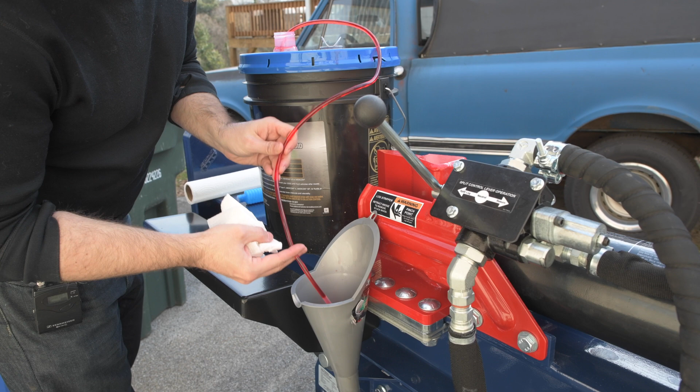All right, I've been sitting here for a little while with it, and it's definitely dripping a little faster, but it's still not dripping very fast. So I think what I'm gonna do is, this is a pour spout on the top, so I could actually tip this bucket over and pour it in there if I could control it well enough. Also, there are manual pumps I could buy that are much higher quality than this piece of junk I have here. I got this one for free.

So Harbor Freight has like a manual transfer pump that'll probably work. I think I might try pouring it first. So let's give that a shot.

Ooh, this is a terrible idea. Let's see. Yeah, it's too full, and it's going to pour too quickly. It's going to overwhelm that funnel, I think.

So I think what I'm going to do is go get a manual transfer pump. Okay, we're back from Harbor Freight, and I feel like it has gotten a fair bit colder since I've been gone.

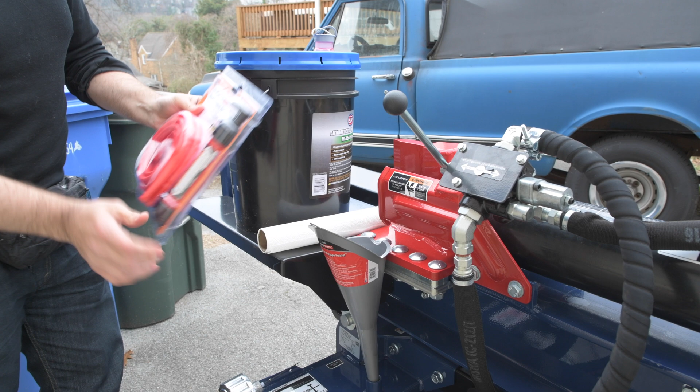Okay, so what I did, they had a 5-gallon pail pump, but when I read the reviews, a lot of people said that it failed pretty quickly, like on the first use or the second use or something like that. So this is a Pittsburgh Tools multi-use transfer pump, and it was about $7. It's real cheap, and it gets stellar reviews. The flow rate is about 2.7 gallons per minute, so I figure that should be fast enough.

Oh shit. That's not good. What the— come on, man. Seriously?

This is not what I would refer to as a high quality tool. It's leaking everywhere, I'm having to hold it together. Oh well, what was I expecting for $7 though, right?

It appears to be a plunger, just like a hypodermic needle. It might be a little more complicated than that, but that appears to be the basic design.

That bucket feels real empty now. I think I've mostly got it, so I'm gonna try to pour it the rest of the way. There we go.

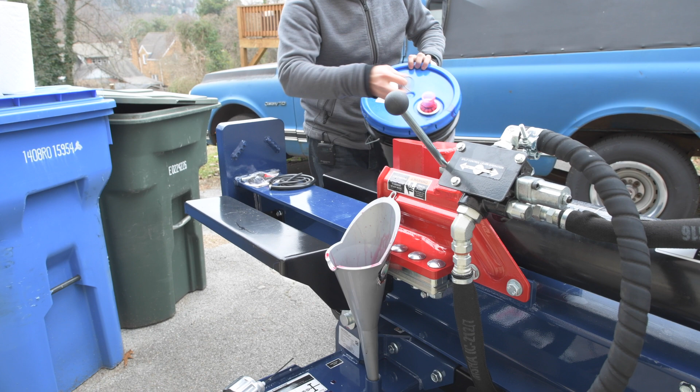Okay, glad to have that stage done. That was not fun. Okay, so now I'm gonna check the oil level. I'm pretty sure I have like another half gallon to put in, but I just wanna check the level, see what's up.

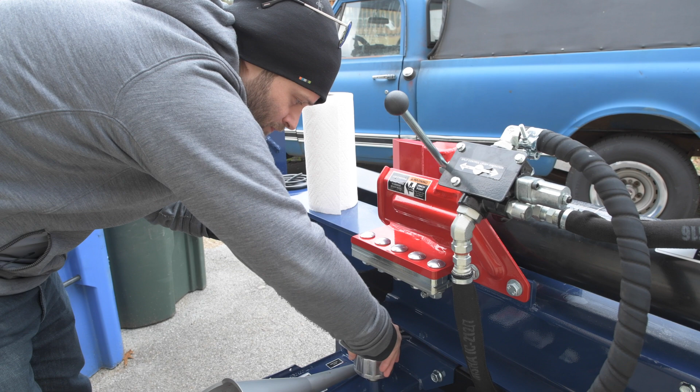It's reading as full, but I don't trust that. Yeah, it's reading as full.

So, tell you what, let's prime it. Okay, so we're gonna prime the pump. And to do that, first thing we're gonna do is we're gonna disconnect the spark plug.

That way the engine can't fire up when we turn it over. And turn the fuel valve off. I believe the fuel valve is already off, but let me just double check. Choke, fuel— oh, the fuel valve was on. Weird. I haven't filled it up with fuel anyway, so it doesn't really matter.

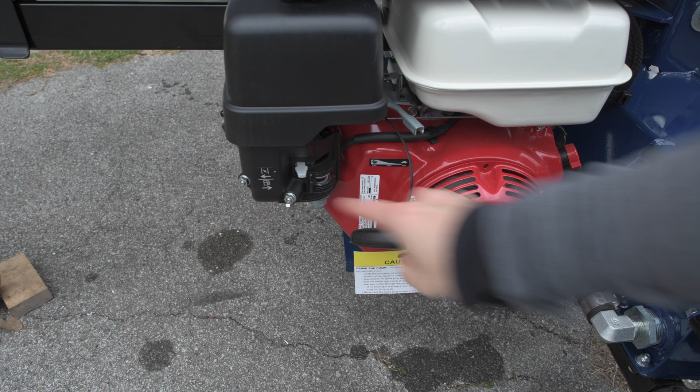Okay, so this is the fuel valve right here, and on mine it came like this in the on position, so I'm just moving it back to the off position.

They are also saying with the engine off, relieve hydraulic system pressure by moving the split control lever back and forth several times. I don't think that's necessary considering it doesn't have any hydraulic pressure at the moment, but let's just... there we go. All right.

Okay, so in initial setup it says push the valve control with one hand into the forward position, pull the starter recoil grip at least 20 times so that hydraulic fluid has cycled through the pump. I guess they want me to hold that while I pull the starter, making sure that the spark plug is not connected.

So, 1, 2... 19, 20. All right, and I'm going to cut this off, it's annoying me. Okay, this is pretty exciting.

They're saying that the next step is to start the engine, reconnect the spark plug wire, start the engine, and use the control valve to extend and retract the wedge 5 times.

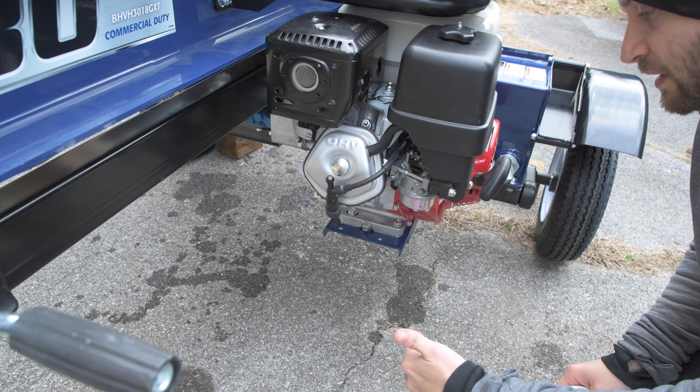Before I do that, I want to make absolutely sure that I put enough oil into the Honda engine, because I realized after I did it last time that you're not supposed to insert the oil dipstick, you're not supposed to screw it in when you're checking the fill level.

So I'm just going to take it out, clean it off, and put it against it without screwing it in. Okay, so that looks like it's about halfway full, I think I need to add a little bit of oil. Hopefully it's not overfilled. Spark plug back in.

There we go. Okay, next step is going to be to fill it up with gas, which I have not done to this point. That should be enough to get it started. All right.

There we go. All right, let's see if it'll start up. So, fuel on, choke on, speed, slow.

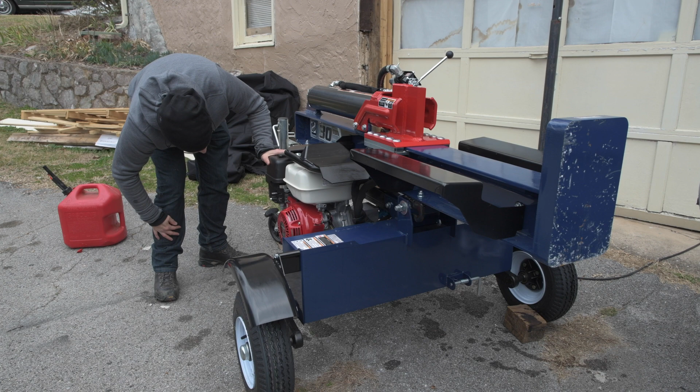Oh, it helps if I turn on whatever that is. What is that? That is, I don't know, some sort of a switch over there. Helps if I turn that on. Let it warm up.

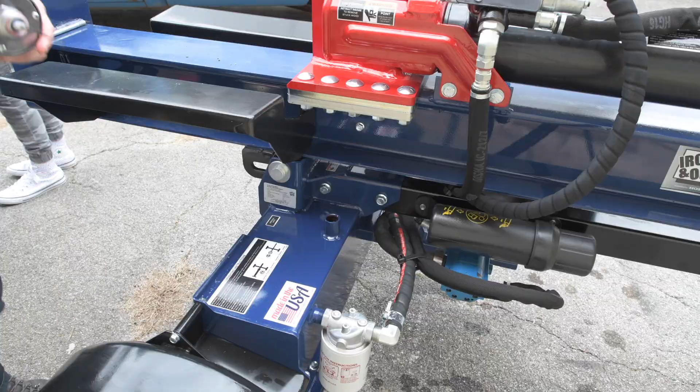Okay, next step is to grease the beam. So this is the beam here, this is the wedge, and the instructions say to grease the top and also the underside of the edges. So probably not the outside of the edges, but the underside of the edge and the top, where the wear pads touch. In the instructions, they don't say which grease to use.

So I took the liberty of calling up Iron and Oak, their parent company, and they said that what you want to do is use white lithium multi-purpose grease. I found this CRC brand multi-purpose super white lithium grease at O'Reilly Auto Parts, down the road from me. It's a 10-ounce tube, costs like $5 or $6, fairly inexpensive.

This is apparently a controversial step. A lot of people on the forums think you don't want to grease the beam, because it'll just attract sawdust and stuff like that. I've never operated a log splitter before, so I don't actually know which one is correct. I'm going to follow the instructions in the manual and use white lithium grease, and we'll see how effective it is.

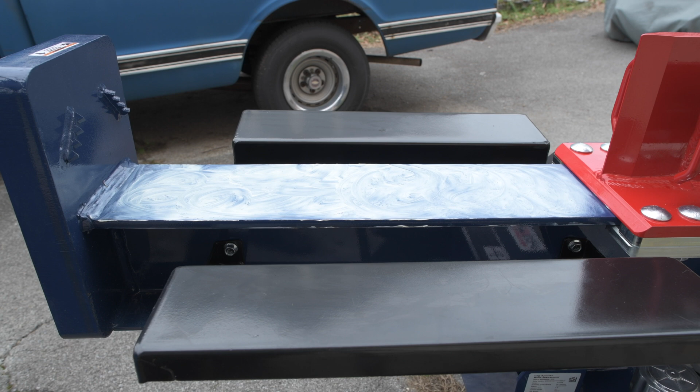All right, I'm just going to spread some on here. I have no idea how much of this it'll take, just give it a bead. I probably shouldn't use my fingers, but that's what I'm gonna do. All right, that is probably too thick, but that's what I'm gonna go with. We'll see how horrible that is for collecting sawdust.

Okay, so one final note here. I'm a jackass, I think Tracy would corroborate that statement. I think I was really dumb for not wearing safety glasses when I turned this thing on, and also for hearing protection. This thing's pretty loud, so I'll attempt to wear these from now on.

The next step, I think we're done with the initial setup, but I'm gonna card all of these hydraulic lines and just make sure I don't see any leaks, especially near the joints. I just want to make sure nothing's spurting out. Hydraulic fluid, even if you get just a pinpoint hole spurting out like a needle, the manual is very clear, it can cause blood poisoning and you could die.

I didn't even know that was a thing before I bought these, but they recommend not checking for leaks with your hands because of that. They recommend checking for leaks with cardboard. So we'll go ahead and card it.

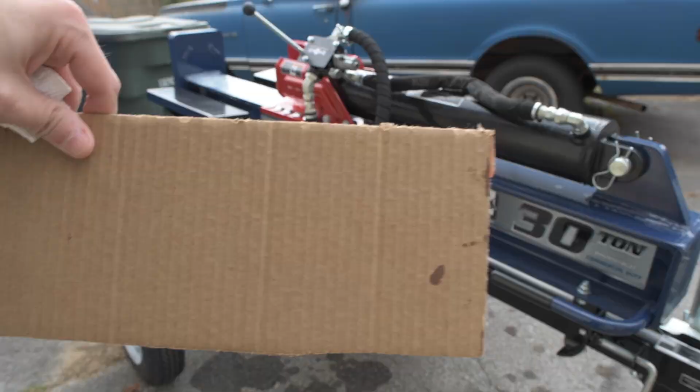Okay, so I got a little bit of a wet spot on the board, but I think that was a drip leak. I wiped it off and couldn't really reproduce it unless I touched the cardboard to a certain place on the pump, so probably it was left over from when I splattered it everywhere before. I couldn't get it to spurt out or anything.

I think we're done. I think the next step is to take it down to the wood pile and start splitting some wood. Let's do it.

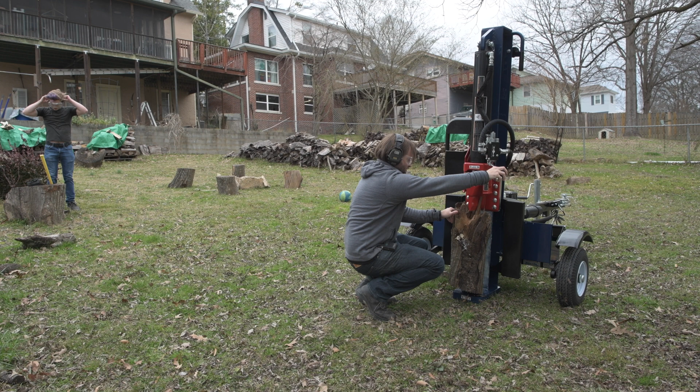Okay, so this is going to be the maiden splitting. Wow, that sounded kind of dirty, huh? All right. Yeah. Yeah.

Okay, so that was the assembly of the Iron and Oak 30-ton BHVH3018GXT. It is a commercial duty vertical horizontal log splitter, 30-ton.